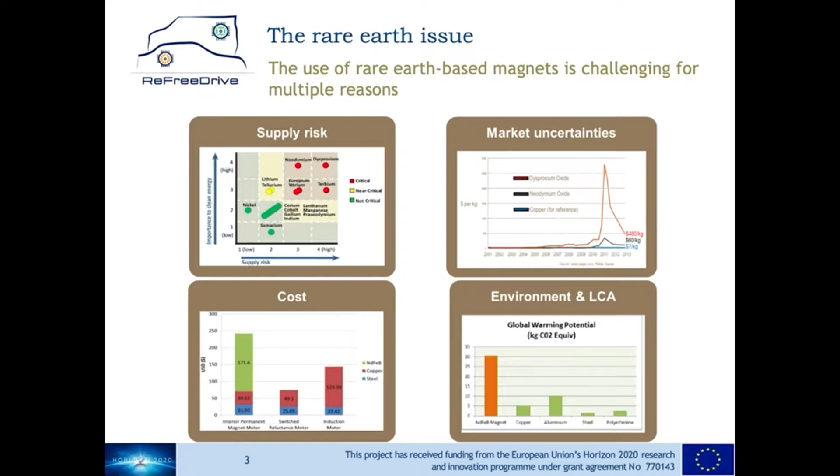Why rare earth free? Well, because of multiple reasons. The most important one is the high degree of criticality both in terms of supply risk and reliance for the clean energy. Second, the cost, which is higher than that of other technologies. Additionally, the price can be highly variable. The graph on the top right corner shows the dysprosium and neodymium price spikes that took place a few years ago. Last but not least, the environmental balance for permanent magnet is significantly worse than that of base metals such as steel or copper.

Now the point is whether we are replacing rare earths with other elements that can be subject to availability problems. The answer is no, as far as copper is concerned. There are sufficient mining and recycling copper reserves and resources worldwide to cope with renewables and e-mobility growth. The primary route is mining, which represents about 70% of the copper supply. With an annual production of about 21 million tons, there are reserves for at least 40 years.

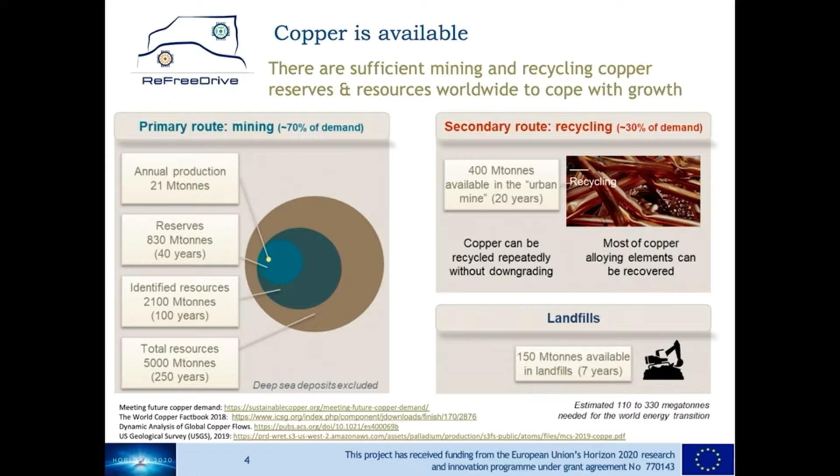But that's not all. Identified resources go up to 100 years availability. Total resources are estimated to reach about 250 years availability. And this doesn't include deep sea deposits, the multimetallic nodules, which are rich in metals, including copper. Together with this, the secondary route, which is recycling, provides about 30% of the demand for copper. It's important to remind that copper can be recycled repeatedly without downgrading, and also the fact that most copper alloying elements can be recovered as well.

The ReFreeDrive project has developed 8 motor variants, 2 power levels, 75 and 200 kilowatt, induction machines following 2 different manufacturing routes, fabricated copper rotor and die-cast copper rotor, ferrite-assisted synchronous reluctance machines, and pure synchronous reluctance machines.

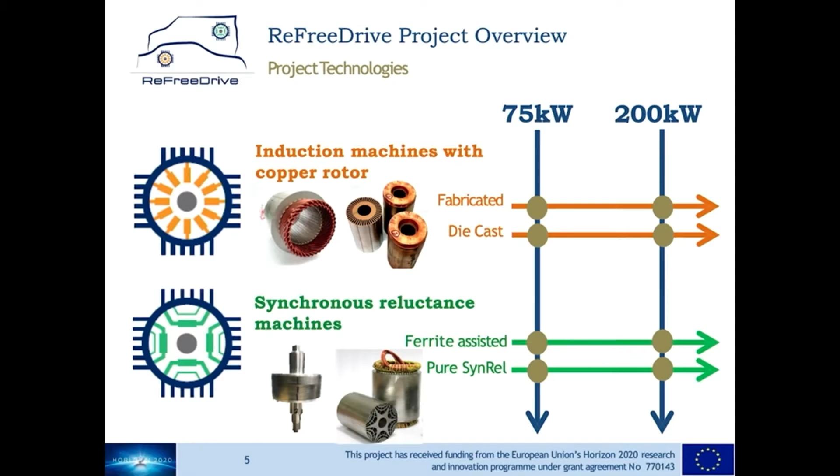Here we show the main KPIs, the benchmark values, and the project achievements. The table on the top shows the results for the 200 kilowatt version, which is compared against the Tesla S60. As you can see, the objectives have been achieved for the 3 technologies, both in terms of specific peak power density, specific peak torque, maximum speed, and peak efficiency.

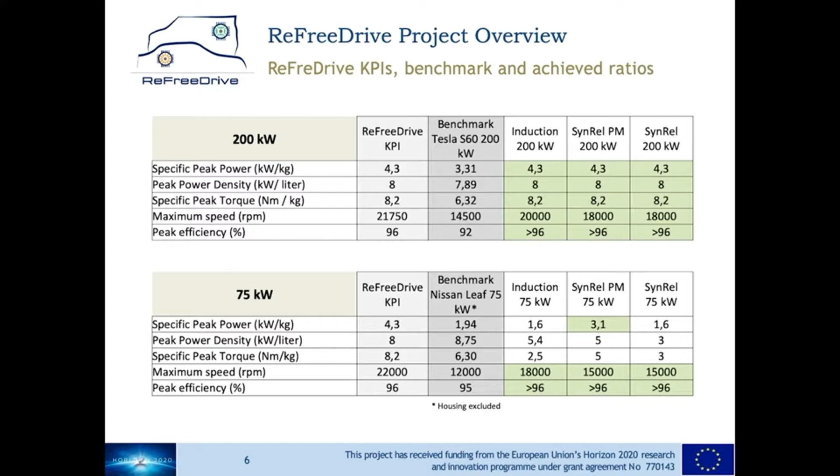The bottom table compares the 75 kilowatt version with the Nissan Leaf, which is a permanent magnet motor. Here, ReFreeDrive models achieve good peak efficiency and rotational speeds, but fall shorter in peak torque and power density. The ferrite-assisted synchronous reluctance motor, however, achieves high specific peak power, even above the benchmark motor.

It's important to indicate here that the designs have been optimized for the 200 kilowatt version. Then the 75 version shares the stator and rotor designs and dimensions with shorter lengths and uses lower voltage levels and lower rotational speeds. The audience should therefore look at the 200 kilowatt version to understand what the technology can really deliver.

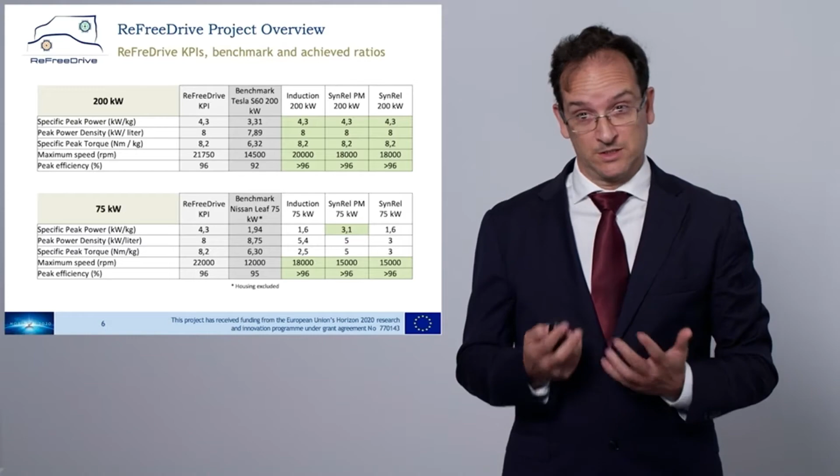A comparison exercise between the three technologies has been carried out by Jaguar Land Rover, one of the project partners. DC voltage is 720 volts. Maximum current depends on the technology. It ranges between 500 and 636 amps. The apparent power required at the inverter level is 430 kVA for induction and 550 for synchronous reluctance.

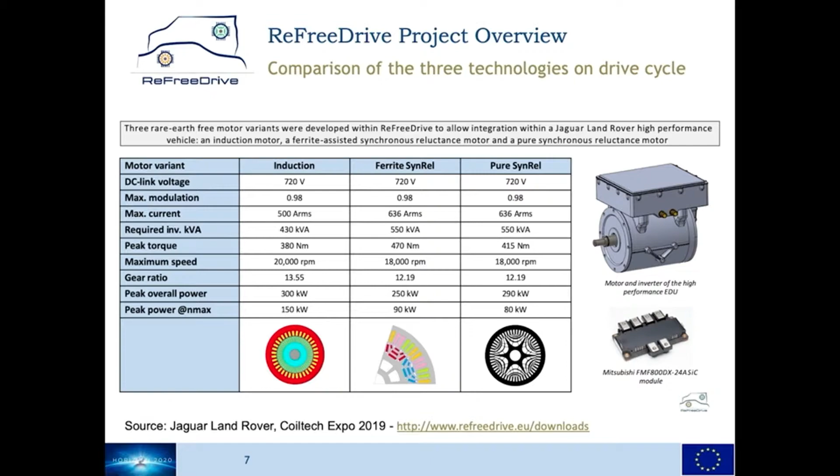Peak torque is 380 Nm for induction, 415 for pure synchronous reluctance, and 470 Nm for ferrite-assisted synchronous reluctance. In terms of peak power, the induction motor achieves the highest values, 300 kilowatt, with 150 kilowatt at maximum rotational speed, while synchronous reluctance models remain below these figures. The rotational speed is 18,000 RPM for synchronous reluctance and 20,000 RPM for induction motor. This introduces a slight bias in terms of comparison between the technologies because mechanical losses increase at higher rotational speed.

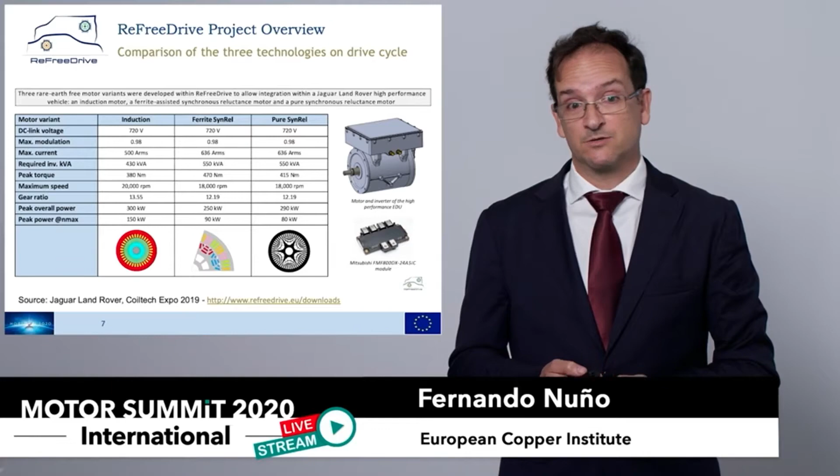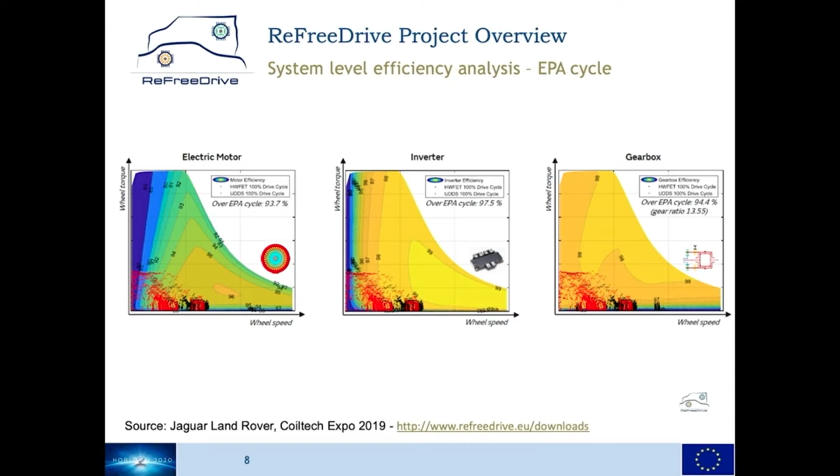A system-level analysis is carried out. This takes into consideration the efficiency maps of the motor, the inverter, and the gearbox. The EPA cycle points are represented in these maps, and the weighted average efficiency of the system with the three components is determined. The results are shown here.

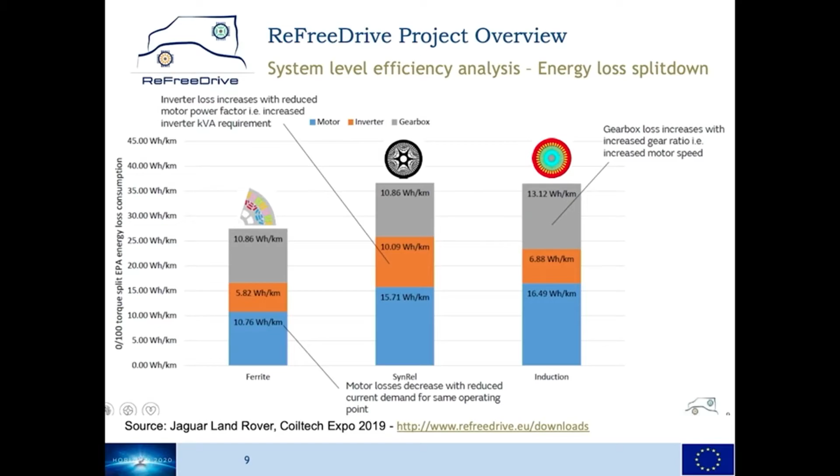The ferrite-assisted synchronous reluctance motor provides the best overall efficiency with quite limited losses in the motor thanks to a reduced current demand for the same operating point. The pure synchronous reluctance motor and the induction motor perform quite similarly. The pure synchronous reluctance motor has higher inverter losses, while the induction motor is penalized by the higher rotational speed, which creates higher losses in the gearbox.

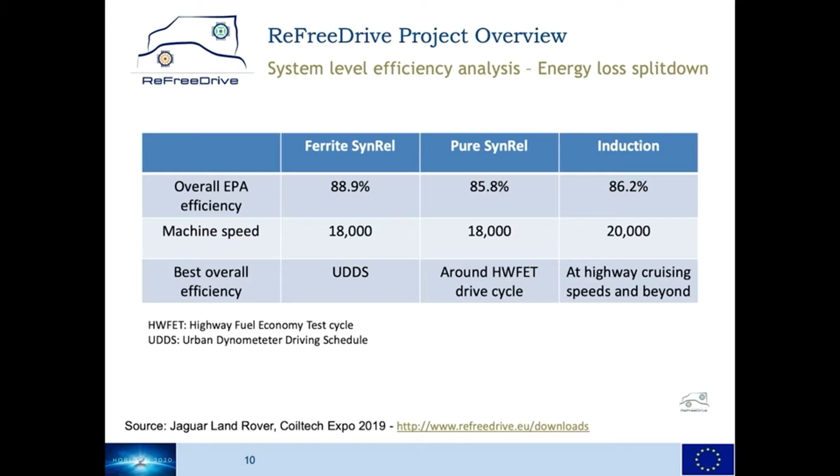The results presented so far are for the EPA efficiency cycle corresponding to the first line of the table here. However, if we carry out the same exercise for other drive cycles, focusing on different performance characteristics, we'll find that pure synchronous reluctance outstands in the highway fuel economy test cycle, while induction has the best performances at highway cruising speeds and beyond. So there is no winner or loser. Each technology can be ideal depending on the purpose.

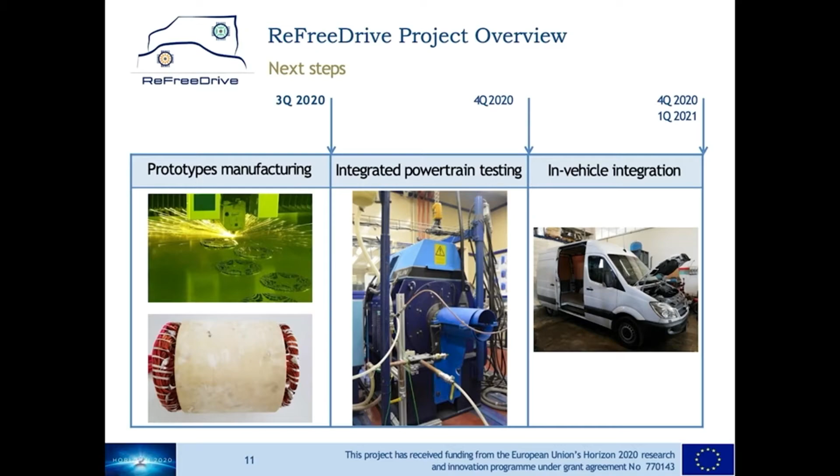What are the next steps in the project? The manufacturing of prototypes has just been carried out, and now we are proceeding with the integrated powertrain testing. The 75 kilowatt version will be integrated in a Mercedes Sprinter and will follow in-vehicle tests early next year.

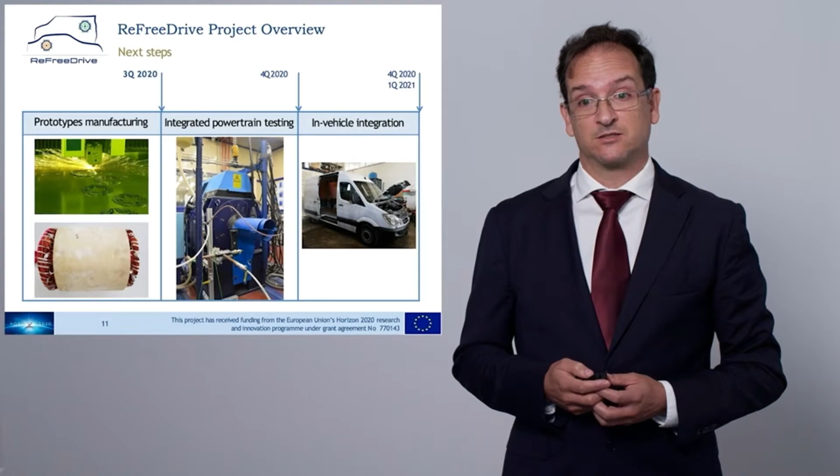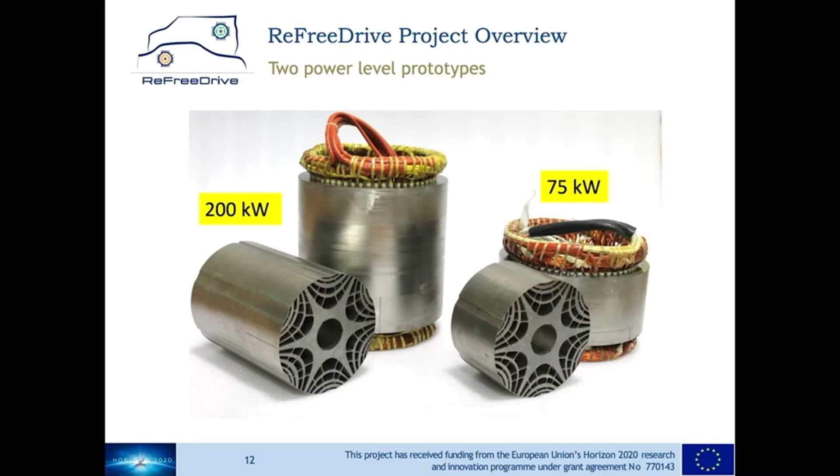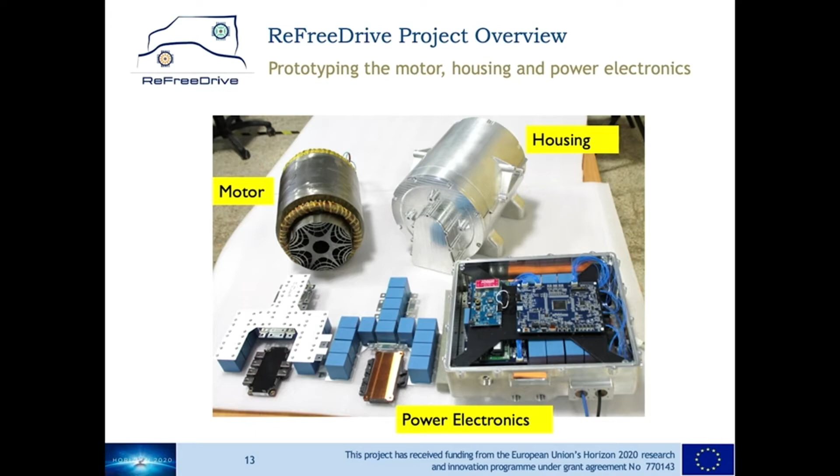Now we show some pictures of the prototypes. This is the pure synchronous reluctance rotor and stator. As mentioned before, the 75 kilowatt version is a derivative of the 200 kilowatt version, sharing its design and dimensions, apart from the length. Here we can see the motor with its housing, the power electronics module, and its housing as well. In this picture, we see how the two housings match together. It's important to mention here that the cooling system is shared between motor and power electronics.

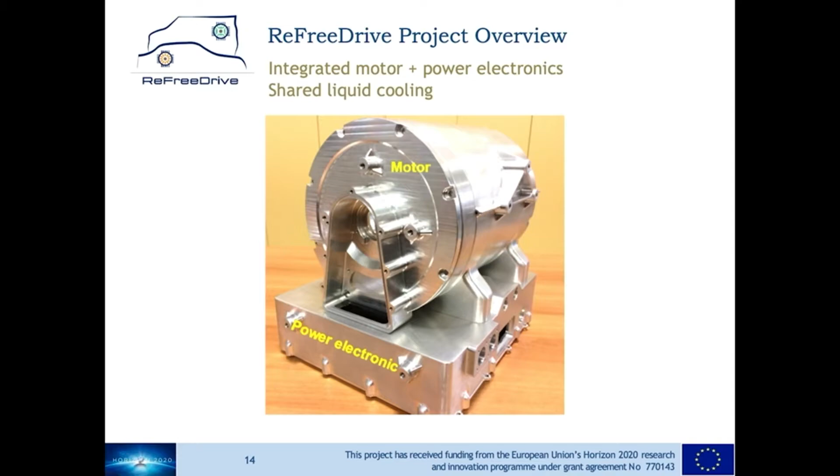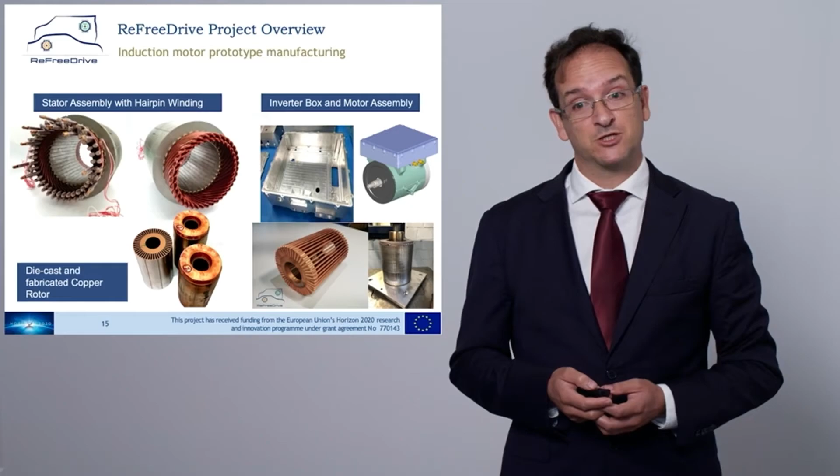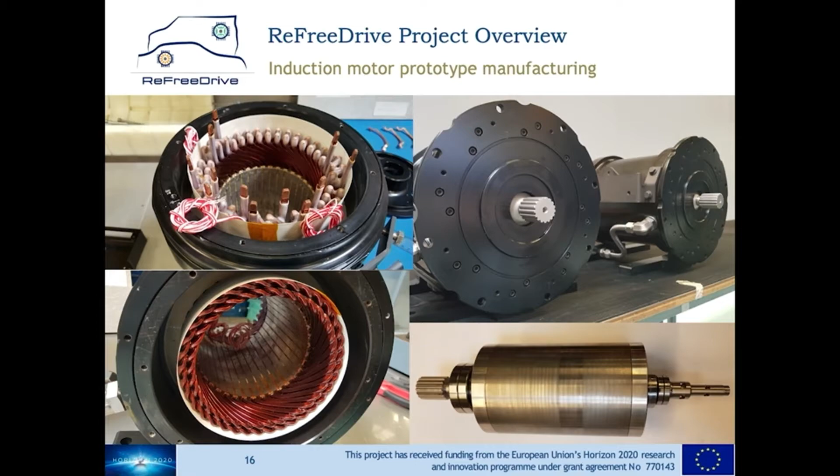Here we focus on the induction motor prototype. In the upper left pictures, we can see the stator with a particular detail on the hairpin winding. On the top right, we can see a detail of the inverter box and the motor assembly. Then, on the bottom, we have some pictures of the die-cast version on the left, then the fabricated rotor cage on the right. A few more pictures of the stator, the rotor, and the final assembly in the external housing.

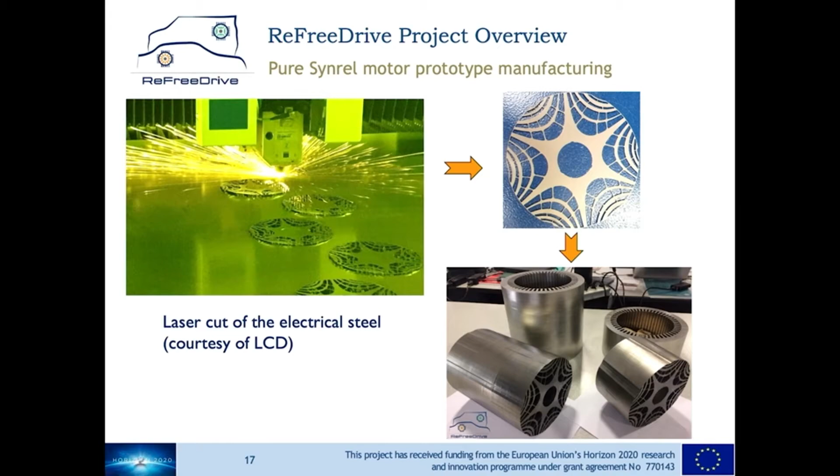And now some pictures of the pure synchronous reluctance motor. On the left, we can see the laser cutting operation of the electrical steel laminations, and on the right, the final stack. A couple of pictures of the ferrite-assisted permanent magnet motor. And as mentioned before, the 75 kilowatt version will be tested in a vehicle for which a series of integration elements are needed, such as the cooling system, the gearbox, the battery pack, the charger and converter, and certain control units.

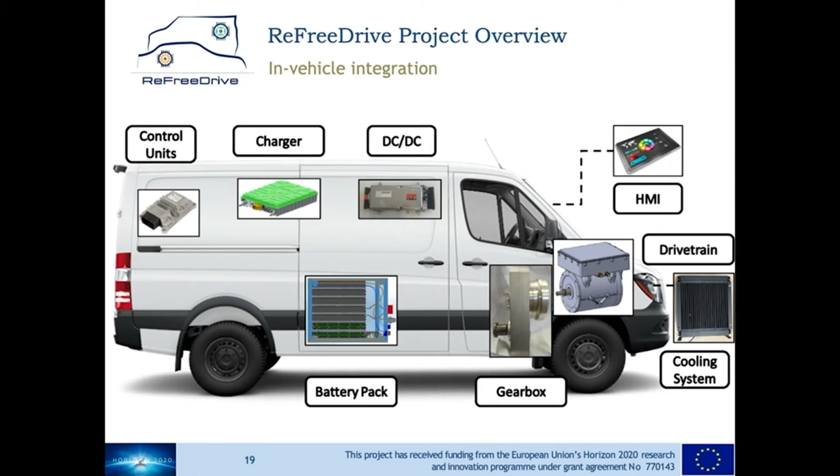So here we come to the end of this presentation. I would like to go through ReFreeDrive partners. First, University of L'Aquila, in charge of pure synchronous reluctance designs and manufacturing, co-author of this presentation. Motor Design Limited, in charge of the induction motor designs. Jaguar Land Rover, which has specified the requirements for the 200 kilowatt version and carries out the techno-economic analysis of the 4 motor versions. Mavel, which integrates the prototypes in the vehicle and checks potential exploitation routes. R13, in charge of the power electronics design and production.

IFP Energies Nouvelles, in charge of ferrite-assisted synchronous reluctance machines and motor testing. Aurubis, in charge of the fabricated copper rotor cage for the induction machine. Breuckmann, in charge of the die-cast copper rotor cage. Fundación CIDAUT for the project management and coordination. Tecnomatic, the provider of the hairpin winding technology. Centro Sviluppo Materiali, in charge of the analysis of multiple electrical steels. Privé, in charge of establishing the boundary conditions. And the European Copper Institute, which promoted the concept, the funding application, and is in charge, together with the University of L'Aquila, of communication and dissemination activities.